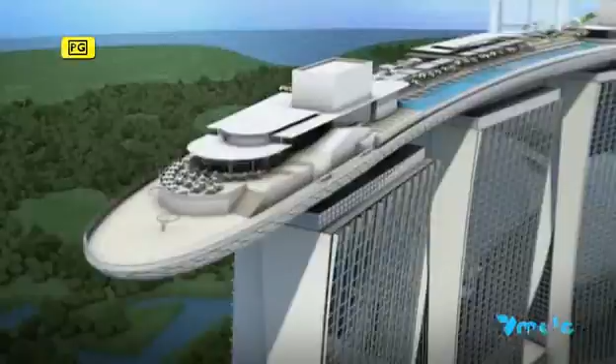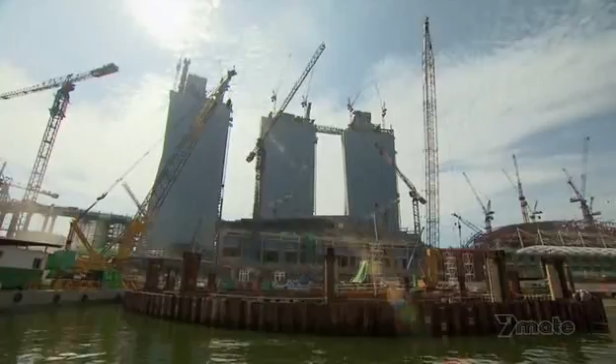Singapore's Marina Bay Sands is one of the world's most complicated construction projects. Engineers have to build not one, but 3 skyscrapers that will shoulder a sky park as big as an aircraft carrier. Worst case scenario, we get stuck. They have to devise ingenious solutions to assemble a 60-metre tall museum of impractical dimensions, install giant artworks, and erect seemingly floating pavilions for shopping and entertainment. If engineers succeed, they will create a virtual city unto itself.

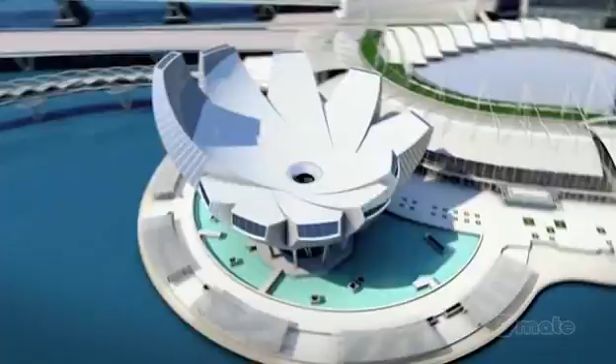Singapore, the Southeast Asian country, is smaller than New York City. The lack of space forces it to build its largest leisure and entertainment hub to date on a small tract of reclaimed waterfront land. The Marina Bay Sands. It's not one megastructure, but many. Serious challenges lie in the array of buildings that form the unique complex. 3 55-story hotel towers slope at such great angles, they're in danger of buckling under their own weight.

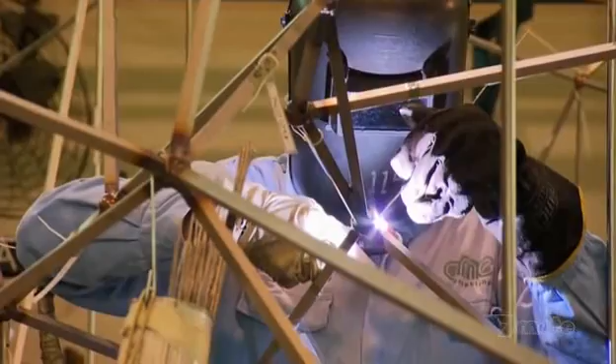An even bigger problem is the hotel's roof. A 340-metre sky park spans its length, containing gardens, outdoor pools, and the world's largest cantilevered observation deck. But how do you build something as big as an aircraft carrier, 200 meters in the air? In the hotel's atrium, mammoth works of art have to be somehow incorporated into the architecture. Its challenging centerpiece, a 15-ton mass of steel by a renegade artist from Britain.

A 60-metre tall art science museum is designed for maximum visual impact. It will be to Singapore what the Opera House is to Sydney. Only one problem. It seems too impractical to construct. And a set of dramatic glass-encased pavilions, while themselves pose little challenge, have to be built in water.

The man behind the Marina Bay project understands the risks, but he believes that anything short of astounding will fail. Sheldon Adelson, one of the world's richest men and CEO of Las Vegas Sands Corporation. What we hope to accomplish is to change the face of Singapore tourism. So we expect a very successful development.

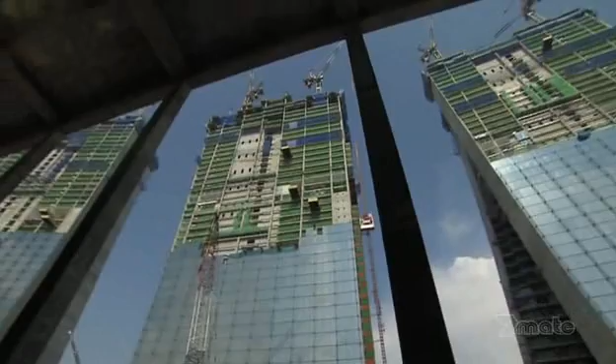That is by far the largest and most expensive single project we've ever undertaken. It'll cost about $5 to $5.5 billion US dollars. It's a lot of money. Now, I know $1 billion doesn't buy what it used to, but by any measurement, it's a lot of money today.

Adelson believes his huge investment is safe in the hands of Moshe Safdie, a world-renowned architect. Safdie is recognized for his use of dramatic curves and geometric patterns. The Marina Bay complex will be his largest and most difficult project yet. I think that architecture has to be timeless. Therefore, what it espouses, what it provides, needs to be something that has a long life.

What's unique about Marina Bay is all the pieces coming together. You can't think about it as individual buildings. You've got to think about it as a piece of city. It's much more a symphony than it is a sonata. On the ground, engineers are more concerned about the reality of building Safdie's vision. This is the North Retail section area.

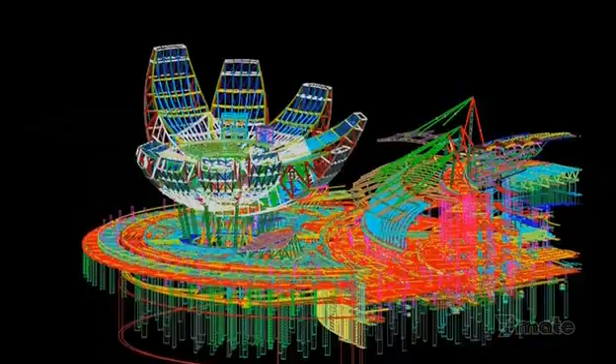30-year veteran John Downs is in charge of overseeing the entire project. The design is very, very diverse, and each component of the project is totally different from the others. For a project of this size, with the planning, with the design, with the construction, you'd be expecting somewhere between 6 to 7 years. Here is basically a 3-year turnaround.

The first and most critical construction task is to secure the footprint, though this normally straightforward job proves otherwise, since the site was originally allocated for boats. The complex sits on 560,000 square meters of reclaimed land, part of a decade-long plan to revamp Marina Bay, a former saltwater estuary that's now a freshwater reservoir.

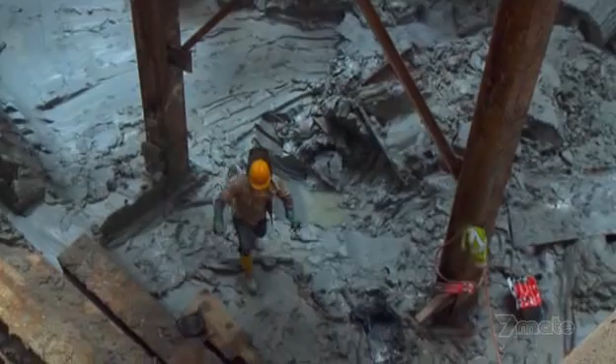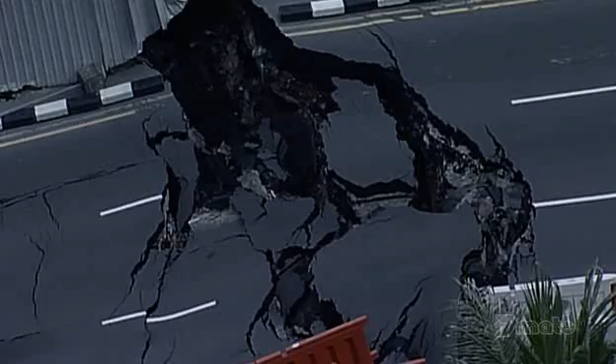Beneath the reclaimed land, which is essentially a seabed, is a dangerous layer of marine clay. Sometimes called black toothpaste, marine clay has very poor structural properties. If not given complete respect, the unstable marine clay is potentially fatal. In 2004, Singaporeans discovered the lethal consequences firsthand. A routine excavation in an underground tunnel for the mass rapid transit network causes a collapse, creating a gaping hole in the Nicoll Highway, killing 4 workers.

The ground conditions in which they were building the Nicoll Highway were not dissimilar to those we are encountering here. They had also soft clay, they had similar depths of excavation between 20 and 37 meters. One of the big things that was learnt in the Nicoll Highway collapse was the importance of monitoring movements and the control of quality as the construction proceeds.

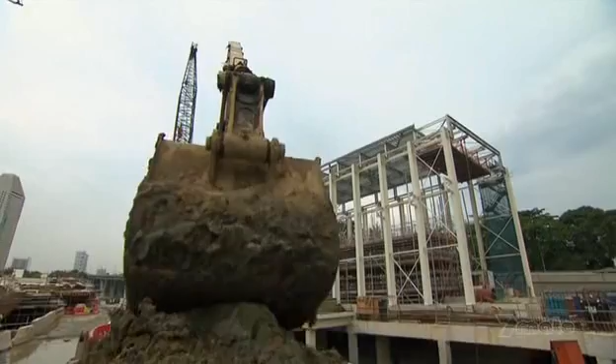Marine clay is an old foe of engineer Mike Barton. He's defeated it in the past by understanding how it behaves. The big problem with marine clay is that it is so soft that when you dig out the inside, the walls will move and potentially collapse and allow all the surrounding water in the bay into the excavation. So, before work can begin, the unstable building site needs major fortification.

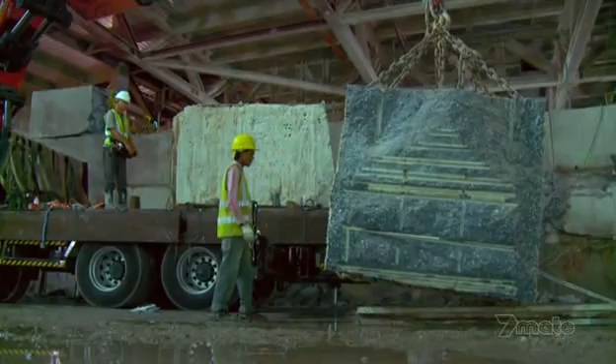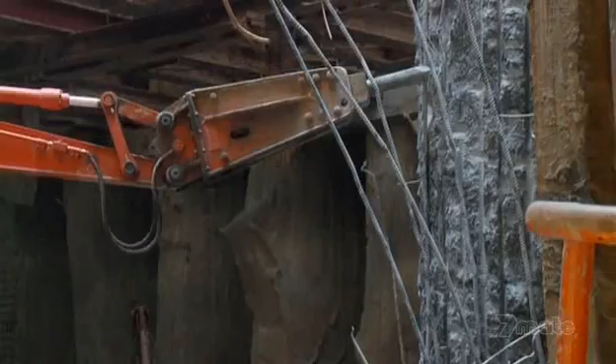To combat marine clay, engineers decide to build giant concrete walls to create stabilizing perimeters for the larger buildings, known as diaphragm walls. Up to 1.5 meters thick, diaphragm walls are steel-reinforced concrete sections, pounded 50 meters into the ground. They form watertight enclosures for men and machines to work round the clock. In just 1 year, over 4,000 meters of diaphragm walls help produce a rock-solid foundation.

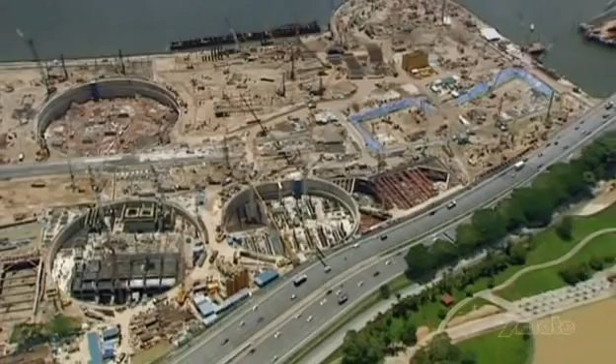The diaphragm walls that we constructed in a formation which we called a peanut formation, which is 2 circles joined together, and a donut formation, which is circular, are able to withstand very, very large forces from the marine clay without any movement. They encapsulate an area that's bigger than a football pitch that enables us to excavate very quickly and to build structure up very quickly.

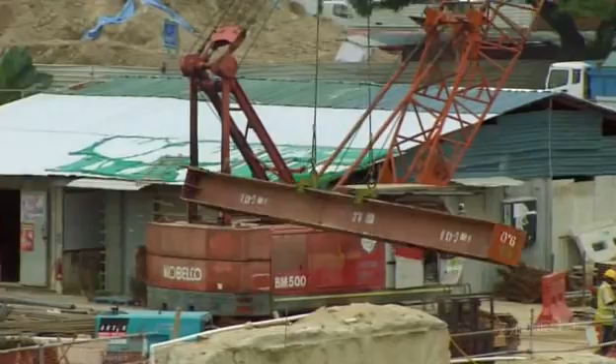Securing the footprint of the Marina Bay project has already taken a year out of John Downes' schedule. He now faces the difficult task of erecting the resort's many buildings in a space of just 2 years. Just managing the whole logistics of that, including the construction methodology, is very, very challenging for us. 1, 2, 3. To meet his tight deadline, Downes chooses the most direct solution. He hires 16,500 workers to construct every single building, simultaneously. It's like leading a small army. So organizational excellence is key.

We're just on the edge of Singapore in the CBD here. So rather than lose the contractors and the workforce to go off-site, we built our own 3-story project office. We have all of our contractors, our subcontractors here. We house our resident site staff. We have our project management team. We have our construction management team, our design management team, and the logistics here.

Come lunchtime, the monster workforce creates another massive challenge for Downes. He responds by building one of the world's largest site canteens. We've got 13, 14 different food styles here. You can see by my shape and size that I eat here every day. I enjoy this food. So here you can see the project bakery. It has its own ovens. It's set up for breakfast. We cater for sandwiches during the course of the day. Can I take a sausage roll, please? So, freshly cooked food, straight from the oven. We stand by our products.

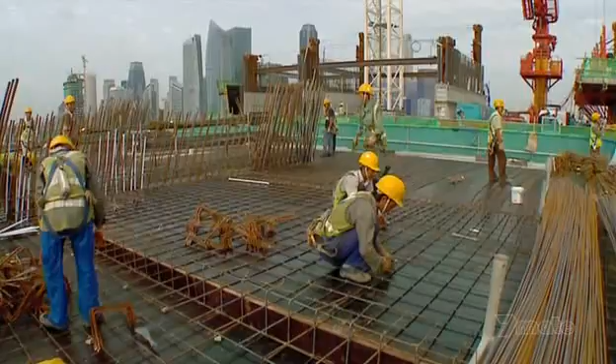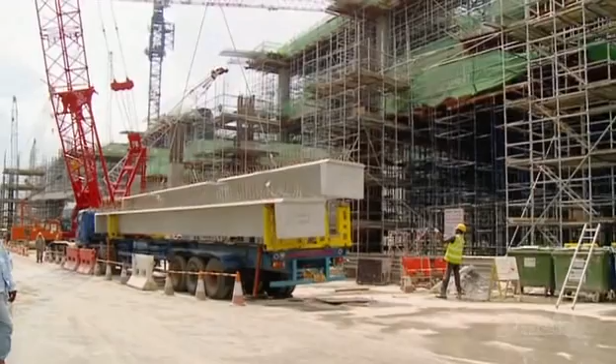The tight schedule also creates problems at the hotel towers, where engineers are already struggling with a congested site. The important thing to do is to make sure that they come in and deliver the goods straight away and then get out again. We don't want too many vehicles on site at the same time. To speed up construction and alleviate traffic congestion, engineers turn to a method that's proven itself countless times in the field: precast concrete casting. Hotel walls are made off site in the thousands. And workers laying the floors are so proficient, they produce 1 floor per 4-day cycle. It's an impressive display for a conventional solution.

But the structure they're attempting is anything but conventional. The key challenge of building the hotel towers is its unusual design. Unlike other skyscrapers, part of the towers slope at incredible inclines. Like a set of collapsing dominoes, the towers could buckle under their own weight if a practical building solution is not found. It's a major concern for engineer Craig Glover. I've been in the industry for 25 years, done a wide range of projects in many different countries, but nothing compares to this whatsoever. There was nothing we could take reference from across the street, on the next high rise, or across town. This is a new frontier.

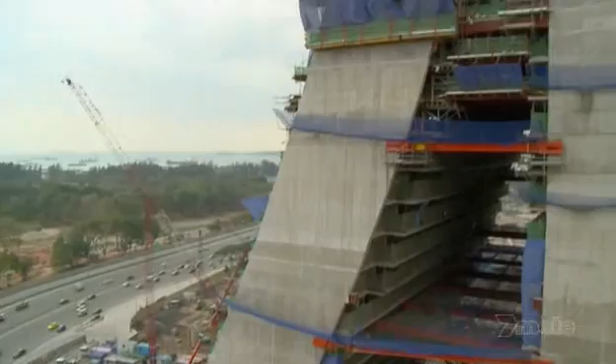Costing a staggering $5.5 billion to build, the Marina Bay Sands could be one of the world's most expensive mistakes if engineers can't solve the tower's problematic structure. Engineer V.C. Cheong leads the design team, and their solution comes out of left field. If you look at the configuration, it's not a straight tower. It's with a sloping leg. So all this sloping leg is inducing a very huge external force onto the structure. We kind of built it without any support. So we actually formulated a solution to prop up the sloping edge.

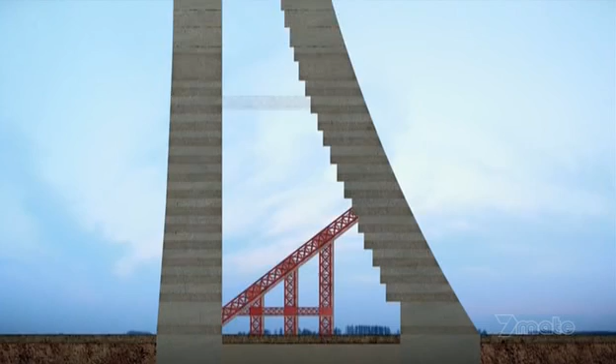Using a technique they've never employed before, engineers build large temporary struts made of strong structural steel. They prop up the sloping towers as they rise. Like a suspension bridge, high tensile steel tendons, also known as tension cables, give an added layer of support inside the walls. In theory, both the struts and the tension cables are temporary and will be removed once giant link trusses connect the towers at the 23rd floor.

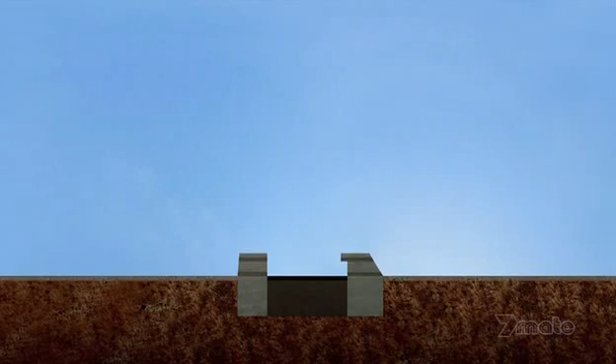The sheer weight in concrete is enough to topple the towers at level 8 if the engineer's calculations are wrong. To reduce the chances of failure, Glover and his team make a radical decision. Instead of removing the temporary tension cables in the tower walls, they make them permanent supports. I feel good it's in there because it's added strength, it's added support.

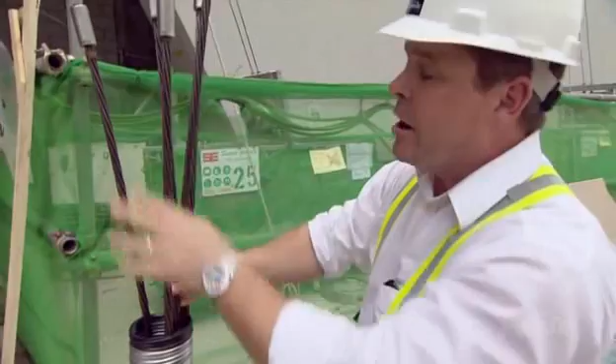We have a tendon here of high-strength steel, and what we do is we bundle these up so they form a cord with multiple strands inside this conduit. We place this conduit inside the walls prior to casting the concrete. So once the concrete is cast, we anchor one end into the concrete. We then put a very high-strength pneumatic jack onto the collar and one by one pull these strands through and tension them up. What that does is basically pull the building back and hold it in place.

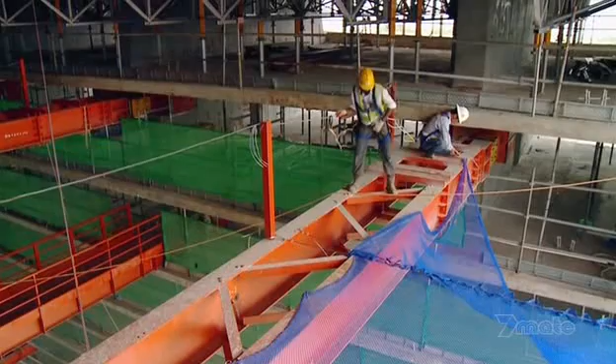If these cables were to suddenly break or if they weren't in place, we wouldn't be able to control the self-weight as we build more and more of the building up. So it's a very important part of the actual engineering of the solution to hold the building in place until we can connect it. Despite the team's quick thinking, the true test of their engineering decisions will only happen once the main support struts are removed and the massive link trusses installed.

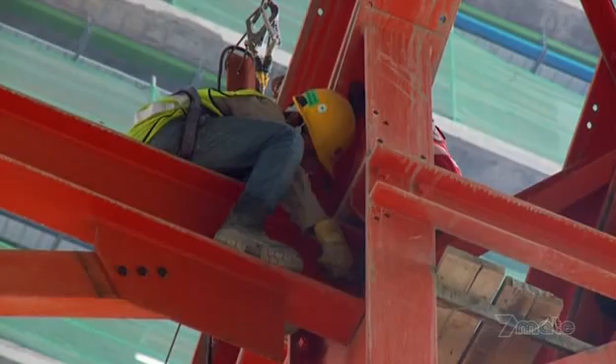Link trusses are huge reinforced steel brackets that bind the towers at the 23rd floor. Once their installation is complete, they transfer the sloping tower's weight completely away from its temporary struts. Once we're satisfied that we don't have any stability issues, then we can bring the large hydraulic cranes in and member by member start to dismantle the struts. We've got a lot of time pressure, so we've just got to make sure that these things keep moving. It's done its job holding up the building, now it's holding up the job.

As the last pieces of support struts leave the site, Glover and his team can finally breathe a sigh of relief. The link trusses are holding the building load. So far, so good. It's a lot of theory, a lot of calculations, but until you really do it and really get it out of the building, you never quite know. I'm always waiting for the phone to call in the middle of the night that we've got something gone wrong. Not all the structures have ended up according to plan.

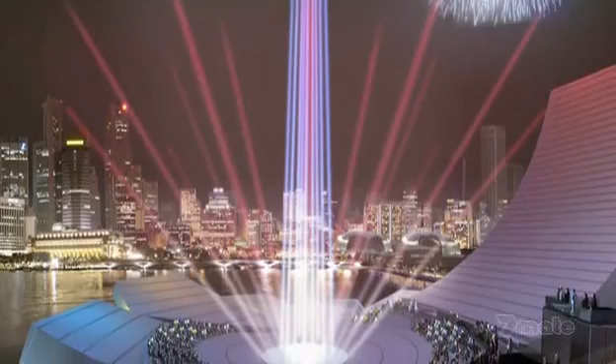The 60-metre-high Art Science Museum is facing a major design overhaul. Planned as a venue for blockbuster exhibitions on the arts and sciences, its bowl-shaped roof doubles as a 3,000-seat amphitheatre. Unfortunately for engineers eager to start its construction, architect Moshe Safdie isn't happy with its current shape. Somebody looked at them and said, looks like a bunch of bananas. In fact, Mr. Adelson said, looks like a bunch of bananas. I said, well, if they look like a bunch of bananas, we're not there yet.

It's terrible news for Safdie's design team, especially its principal, Gene Dyer. There are times that Moshe will come in with an idea. We think it's quite exciting. We'll pursue the idea for weeks or even months. He'll come back and say, I want to change the idea. And we've already bought into the idea, so it's a bit frustrating.

To rework the unique geometry and dimensions of the Art Science Museum, Dyer and his team turned to advanced 3D modeling programs. It not only makes navigating the museum's complex geometric patterns easier, it shortens the process to a matter of days. The model is dynamic and it can be moved by just changing one or two elements. Moshe could experiment. He could make rapid judgments in a very short period of time about which way he wanted to take the project. This is a process that was impossible to do 10 years ago. Without the computer, this would take years and years and years.

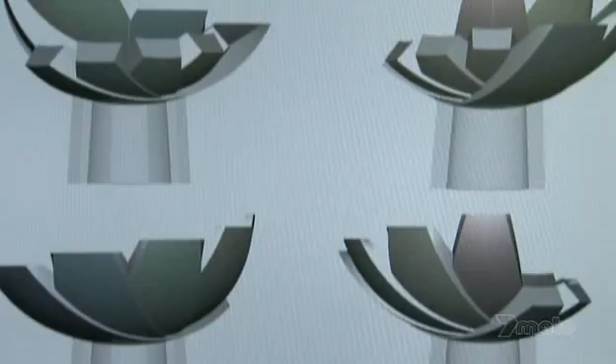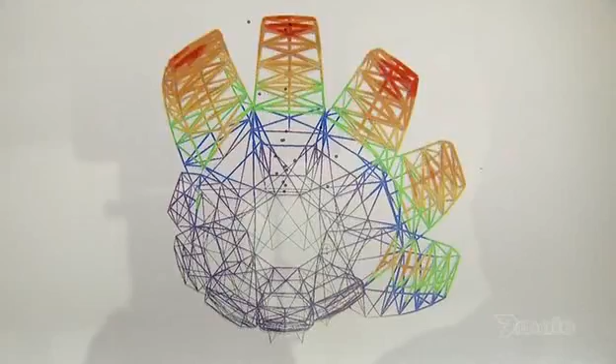To rationalize the new look into a buildable structure, architect David Robbins splits the museum into spheroid segments. We began to look at using different spheroids to define the different upper and lower surfaces of this building. That gave us a very rational way of describing the plan form to our clients. After months of refining the design, Safdie is finally happy with the result. The mathematical precision that we gave them made them even more beautiful. It led some people to say, well, hand of welcome. Others said, is that a lotus? And the more ambiguous the associations, the closer I thought we were getting to our target. Because I think the least exciting buildings are those which have overt symbolic associations.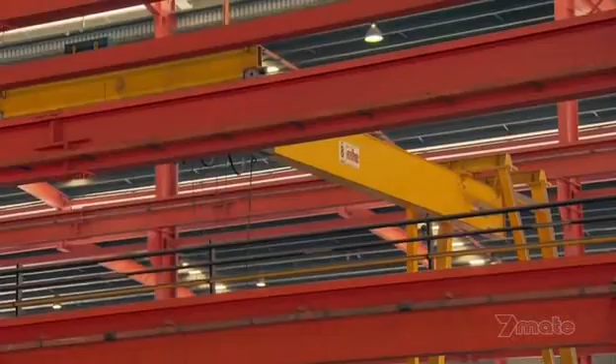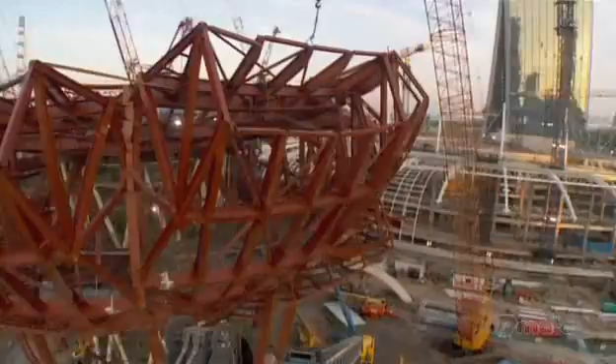Armed with the new design, engineers begin work on the museum's 60-meter-high superstructure. A staggering 5,600 steel elements weighing some 5,200 tons are prefabricated to exact specifications. They are then trucked onto site and assembled. It's like putting together a giant jigsaw puzzle. Each element has to be installed with pinpoint accuracy. If it's even a few millimeters off, engineers will have to start from scratch. Engineers of the massive atrium at the base of the towers are facing an equally tough construction process.

Safdie has come up with a challenging design. He wants to inject art into the atrium's architecture so that visitors will feel like they're walking through a grand Gothic cathedral. In medieval times, if you think of a Gothic cathedral, there's the architecture, there's the stained glass windows, there's the sculptures on the pinnacles. You cannot draw a line and say art and architecture. Art and architecture are one, they're singular experiences. And I think what we try to do here is come back to this integrative mode.

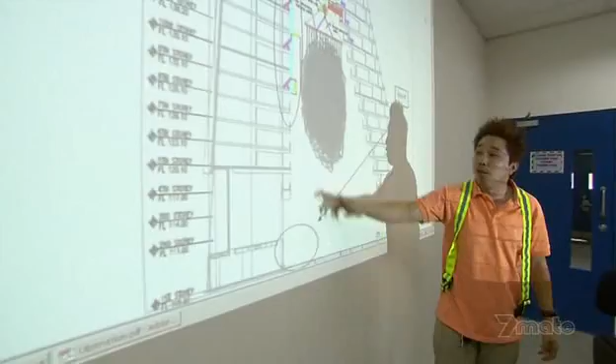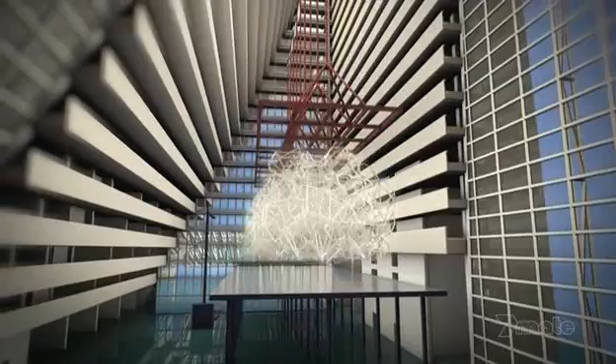To create the centerpiece of his vision for the atrium, Safdie commissions renowned British sculptor Antony Gormley. Famous for his unusual approach to art, Gormley is the brains behind the Angel of the North sculpture in northern England. What he's about to attempt is proving to be more of a construction challenge than an artistic one. A cloud-like sculpture some 40 meters long, made up of 15 tons of high-grade stainless steel, hung 12 stories above the atrium.

The Angel of the North is, in a way, making a very traditional public sculpture because it's isolated in space at the edge of a valley. You can see it for miles and miles. It's very much about occupying space. This is about activating space. You can't see it for miles and miles. You have to be in the space with it. Each viewer, every person coming out of their hotel room will confront this big chaos thing and have to find their place in it. I think that's an exciting thing.

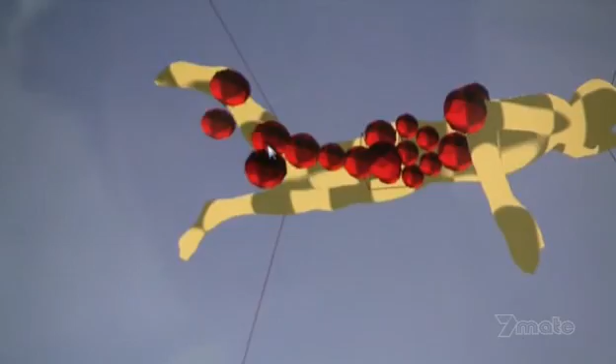Called Drift, Gormley's steel sculpture is so huge and so complex that it can't be sculpted using traditional methods. Gormley's team has to create state-of-the-art 3D computer programs that translate his ideas into buildable plans. But just as they're about to begin construction, a bombshell drops. September 2008, a global financial crisis wreaks havoc on markets. The flow of the hundreds of millions of dollars that keep the Marina Bay project going every month suddenly stops.

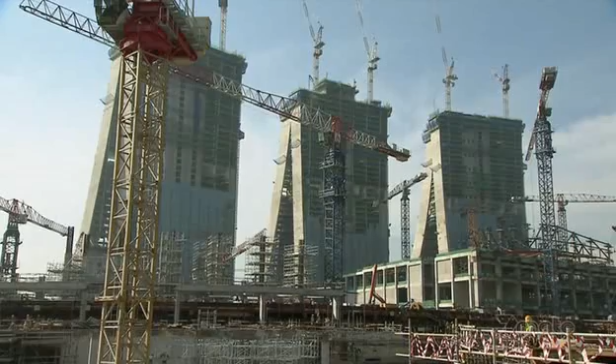For engineer Matthew Pryor, it's a massive blow. I feel devastated. It couldn't be worse. Probably the worst day of my life professionally. There's no more money coming through. So unless we put some funding in place or there's something, we're going to have to shut the jobs down. But there's a tough decision to be made, and we don't know what we're going to do just at this point in time.

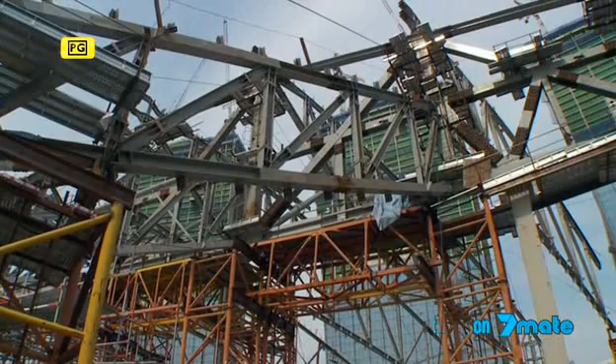With the future of the multi-billion-dollar project plunged into doubt, all eyes turn to the man behind it, Sheldon Adelson. The next move of one of the world's richest men will determine the fate of the mega construction site. The 2008 global financial meltdown is a haunting echo of the 1990s Asian crisis. Back then, progress on Shanghai's World Financial Center came to a complete halt for 5 years. For Adelson, that's simply not an option for the high-profile Marina Bay resort. His vision of changing the face of Singapore tourism is at stake. And so are billions of dollars of investment from his Las Vegas Sands Corporation.

He prefers finding a stopgap solution to weather the storm. Throughout history, there has never been a trend that went straight up, nor a trend that went straight down. So it goes up and down. It's only a matter of time when things will recover. In a bold move, Adelson pledges his vast personal wealth to the completion of the project, effectively ending any speculation of failure. There's a massive sense of relief in the company. I mean, everyone pleasantly surprised how quickly we've got through this and the fact we could hold it together and get it going again. So euphoria is probably the best way to describe it.

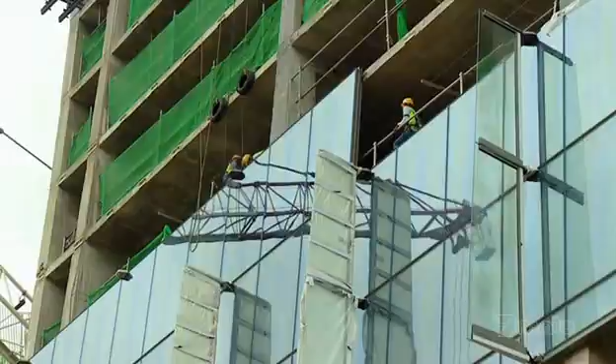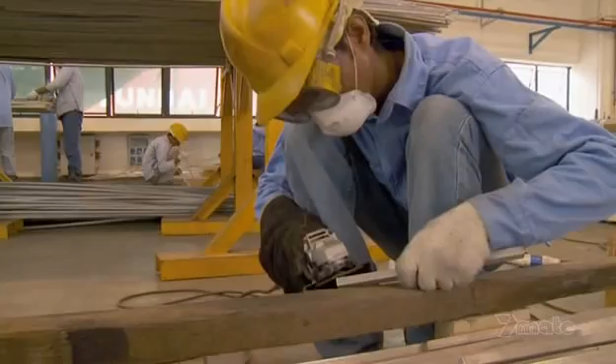With the crisis averted, construction on the 3 55-story hotel towers, the casino, theatres and convention centre resumes at pace. Everywhere you turn, steel is being installed. It's vital reinforcement for every concrete structure on the 15.5-hectare site. For one project at the tower's atrium, steel is more than just reinforcement. To construct the 15-ton Drift sculpture by British artist Antony Gormley, engineers had to first laboriously prefabricate it into over 70 segments. The segments are then welded into 8 slices and will ultimately form the sculpture.

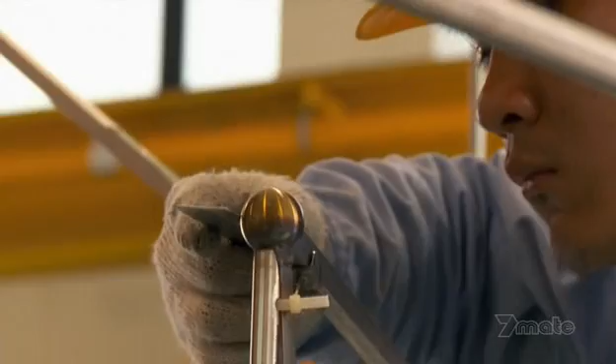It's a tricky operation, but engineers are able to complete it swiftly due to a system of codes and numbers that enable them to quickly identify what goes where. Once all 8 slices of Drift are fully assembled, it's lifted up into position by a temporary lifting frame. A massive box truss on the atrium ceiling then takes over the load. In theory, the box truss will support the weight of the lifting frame as it's being lowered down. It will be a heart-stopping moment, especially for engineer Graham Stevenson. The lifting frame is about 9.5 tons, so when it picks up and gets some momentum, there's a potential that it just wants to flick over and rotate through its full 90 degrees, and we won't have it under control.

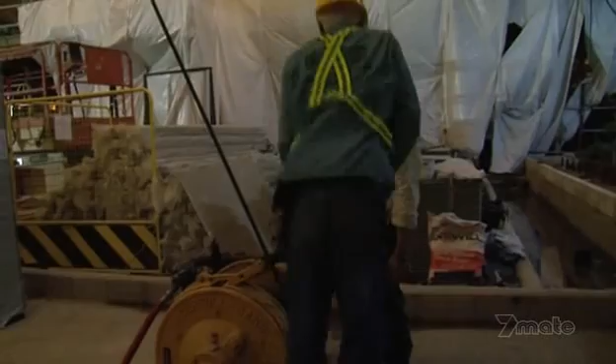Stevenson's solution: 4 powerful automated hoisting drums located at the 4 corners of the frame. They allow workers to control the strength and speed of the operation with high tensile steel cables. A spotter at the top determines the pace of the procedure and marshals the team.

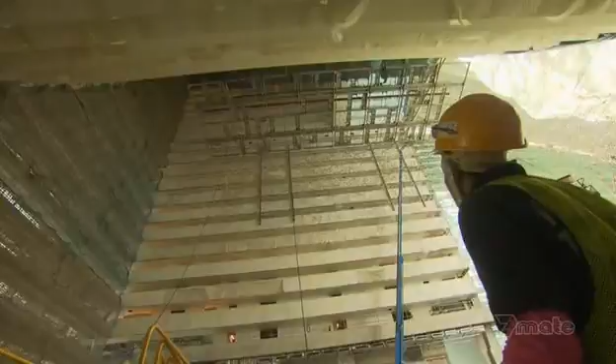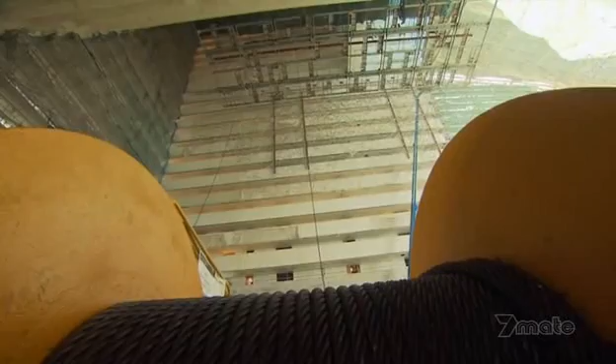With their preparations complete, it's time to face the moment of truth. Sculptor Antony Gormley is as anxious as any of the team. Number 3! The entire operation is estimated to take up to 10 hours to complete. As soon as the frame is in motion, there's no turning back.

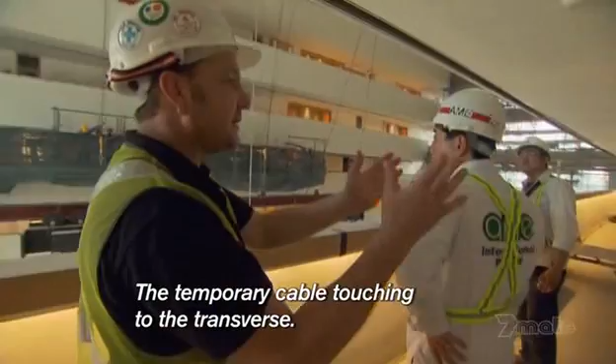Midway through the lift, Stevenson receives reports of a potential problem. 22 story, number 7 temporary cable, scaffolding touching the cable. Why you got the temporary cable touching to the transverse? Yeah, but is it just the end of a tube? Yeah. So you can just cut the tube? Yeah. Problem solved.

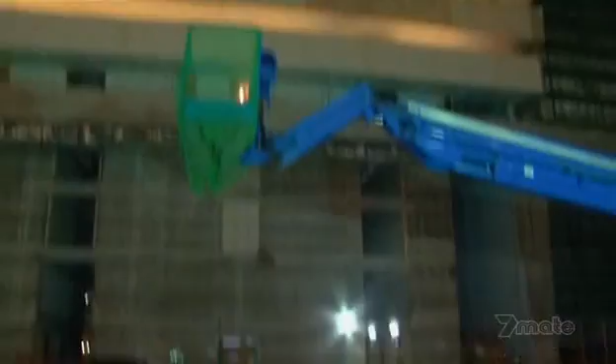But what was previously an estimated 10-hour procedure now turns out to be a 24-hour marathon lift. At 6 a.m. the following morning, they complete the job. Absolutely fantastic. The Gormley is now finally in its final position, so really an end of a long and exhausting day, and big thanks to everybody, but it's finally done.

While the drift settles into its new home at the hotel atrium, elsewhere attention is focused on one of the project's key features, the Crystal Pavilions. The two glass-encased buildings by the promenade are set to be the resort's premier shopping and entertainment complexes. But before engineers can make them a reality, they have to secure their footprint. And already a major obstacle threatens to sink their objective.

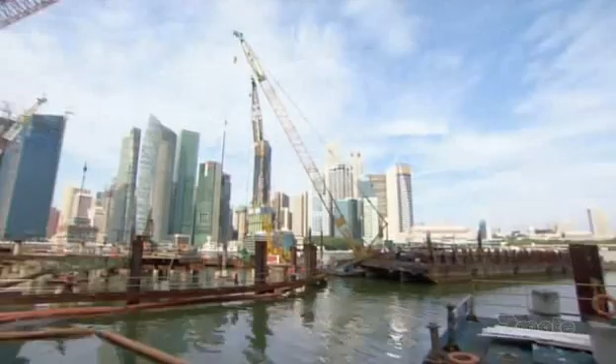The Crystal Pavilions are situated within the confines of Marina Bay. So to found it, engineers have to find a way to build in 6 meters of water. The responsibility of tackling the problem falls on the shoulders of engineer Kurt Vella. I'm from Sydney. The underlying foundation in Sydney is sandstone, it's rock. All you need to do is just dust off the surface and you can build skyscrapers on it. Here it's very different. All the structures have to be heavily founded.

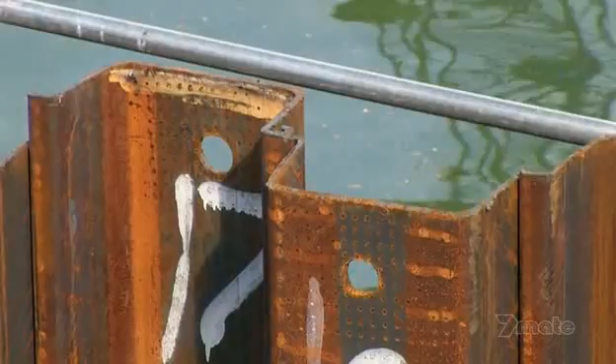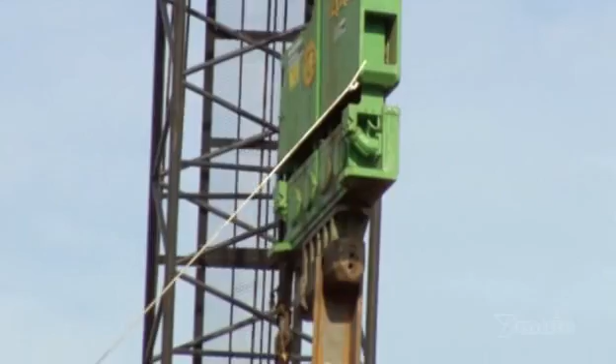To keep water out of the construction site, only one solution seems viable for Vella and his team. A waterproof steel structure called a cofferdam. This temporary formation surrounds the worksite with a circle of steel sheet piles, creating an impenetrable shield that locks out the water, keeping the workers safe within. For the job, they rope in a 12-ton vibro hammer. It punches the sheet piles deep into the earth, making the cofferdam rock solid and resistant to movement.

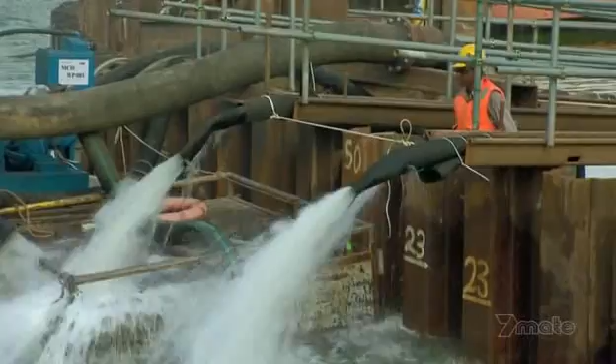With the cofferdam secured, engineers deploy powerful diesel pumps and run them 24 hours a day, ejecting any water that remains within the walls. This last step comes with inherent dangers. The force of the water outside creates what engineers call hydrostatic pressure. In theory, it's powerful enough to force water through any gaps in the cofferdam. It's something that Vella prays will not happen.

There's a bit of hesitancy and concern because we've got to build this building in the middle of Marina Bay. Everybody can see what we're doing, so if it leaks, it's a problem. If it fails, if it moves, if it collapses, it'll be an absolute catastrophe. After a day of pumping, Vella's worst fear comes true. Parts of the cofferdam are leaking.

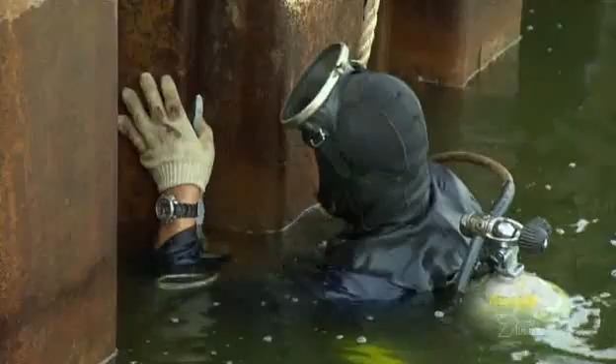To rectify the problem, Vella orders a team of 8 divers into the water on 10-hour shifts. Their mission? Find out where the water is being forced in and plug them shut with epoxy resin. Anson Lee is an 8-year diving veteran. The toughest part of my job is the environment. The visibility is poor here. It's totally zero, I cannot see anything here below.

I solve that by feeling the suction and then feeling out the thing. You have to overcome all the fear that you can't see under the water, but okay lah. I feel proud to be one of this team to build this thing out. After 2 weeks of hard work by divers and the pump crew, the job is finally complete. Kurt Vella can also breathe easy.

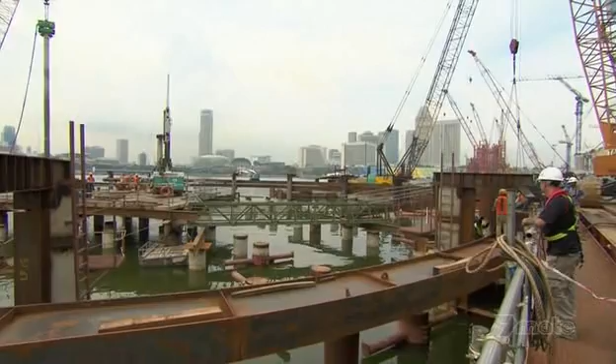Every job is different, every job has its challenges. You plan and prepare, you try and identify your risks in advance, and you try and come up with contingency plans. And that's what's really enjoyable from my perspective. That's what gets me out of bed in the morning.

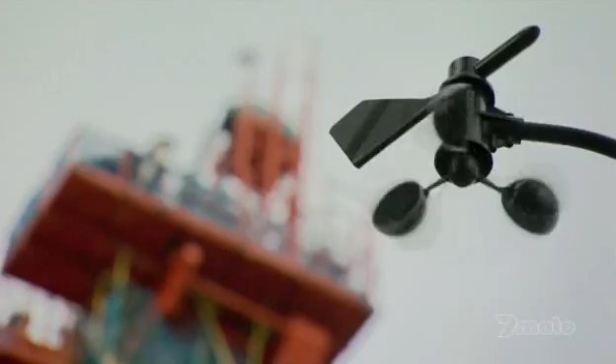After 2 years of battling the elements and overcoming difficult construction milestones, the 3 sloping towers of Marina Bay Sands can finally celebrate their topping off ceremony and move on to the next phase. But a destructive force of nature threatens to throw a spanner in the works. With climate change predicted to affect the pattern of Southeast Asia's typhoons, Singapore may one day experience the destructive tropical storms plaguing its northern neighbors in the Philippines and Taiwan.

When that happens, typhoon-force winds could spell disaster for the hotel towers, especially the 340-meter sky park sitting on top of it. The force of the wind can make the buildings sway dangerously, causing irreparable damage to the structures.

The Sky Park, offering 360-degree views of Singapore. The visionary design will have enough surface area to park 4.5 Airbus A380s. But when architect Moshe Safdie first mooted it, it stemmed from a purely functional need. Luxury hotels, as we think of them, always have lots of open space around them, gardens, at least in the kind of tradition. But we didn't have much space left.

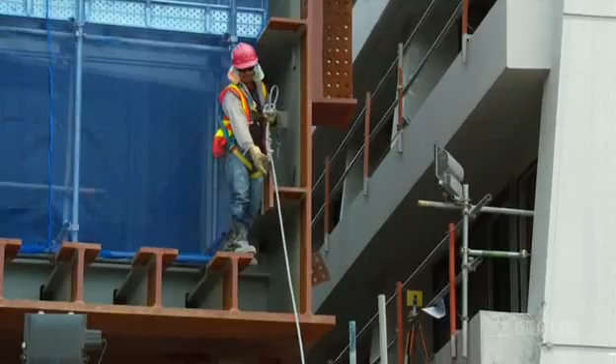To fight the enemy, McKee knows he has to first understand the enemy. He hires leading US wind engineers CPP to carry out extensive testing on the towers and sky park. Their mission? Find out how Singapore's potential wind forces affect the buildings. Wind engineer Roy Denoon oversees the process at their state-of-the-art wind tunnel in Fort Collins, Colorado.

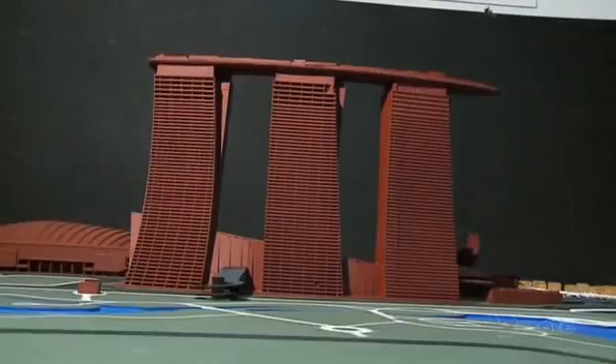The thing that makes this really special is the fact that we have this sky park running across the top, linking all the towers together. So whereas normally with a normal tower, we'd measure the loads on the tower in isolation, with this one, what we're needing to do is to measure the loads on all 3 of the towers at exactly the same time. So that way we can know how the towers are going to move relative to each other, so we can make sure that they're not going to put excessive strains or movements into the sky park.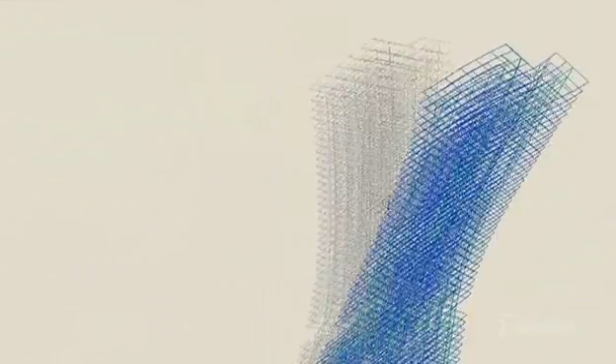During the tests, a scale model of the Marina Bay Sands towers is blasted with 40km/h winds to simulate faster typhoon winds in reality. Over 1,000 pressure measuring instruments inside the model register how the winds affect the buildings. At the end of the tests, engineers confirm that the 3 towers can deform by some 200 millimeters during the fiercest storm. Engineers quickly figure out a solution: movement joints. Inspired by bridge engineering philosophy, movement joints are essentially gaps located between the concrete towers. The huge gaps allow for movements of up to 250 millimeters.

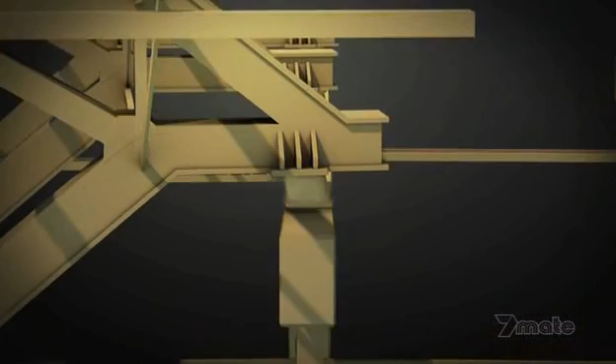Aluminium and stainless steel plates act as sliding components. They can move back and forward over each other, a little bit like you'd see in a flexible bus, where you have that articulation happening in the middle. It's a similar concept to that. To accommodate the differing movements of the three towers, engineers install multi-directional steel bearings below the Sky Park. The solution scores major points with Tony McKee.

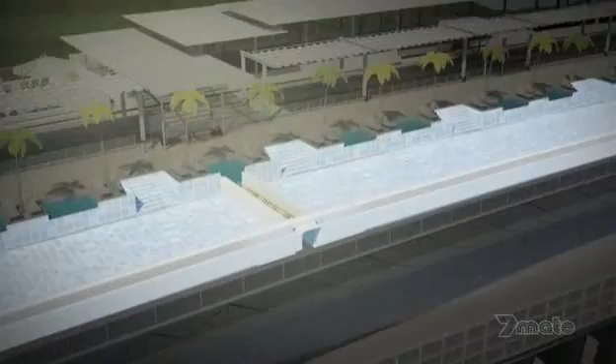Only one problem. It won't work with a rigid structure containing 1.5 million litres of water. Any movement in the joints could fracture the Sky Park swimming pool, endangering lives and property below. With the help of US pool builders Natare, McKee quickly develops a solution, but it's completely unproven. A secondary system of movement joints built into the pool itself. The plan: to split the pool into 3 smaller 50-metre units. Steel top hats then conceal the gaps. Huge basins catch any runoff pushed up by the moving pools.

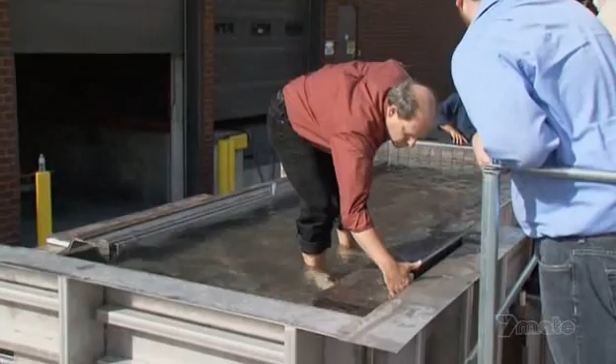McKee knows he only has one chance at making this work. So he commissions a trial by water. What we've got here is the side of the swimming pool, which replicates the movement that we're going to get between the towers. And what the Natare guys have come up with here is a simple track system which can be pushed back and forward by a forklift. And that replicates the full range of motion that we have on the swimming pools, which can be 0 to 250 millimetres either way.

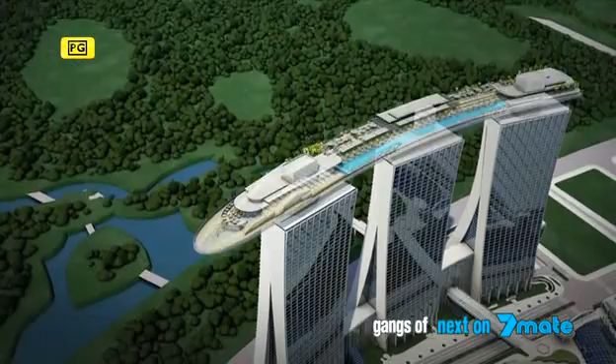It takes engineers weeks of testing before they're completely satisfied. Consisting of some 10,000 tons of steel, the Sky Park is as big as an aircraft carrier. The most practical way for engineers to construct it is to break it into 14 segments on the ground before assembling it at the top of the towers. There's no room for miscalculation at 200 meters in the air. Each segment is carefully prefabricated and tested by steel specialists Yongnan, and then trucked to the site independently.

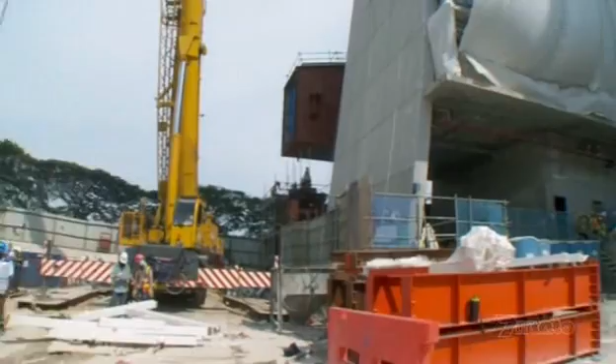From the very beginning, McKee and his team anticipate that their biggest challenge will be lifting the 2 largest segments of the Sky Park, the box girders. Measuring 80 meters long, their combined weight is a staggering 1,400 tons. How do we feel? A little bit of apprehension. You know, it's a significant lift that hasn't been done before. If something goes wrong, it could be really significant for us.

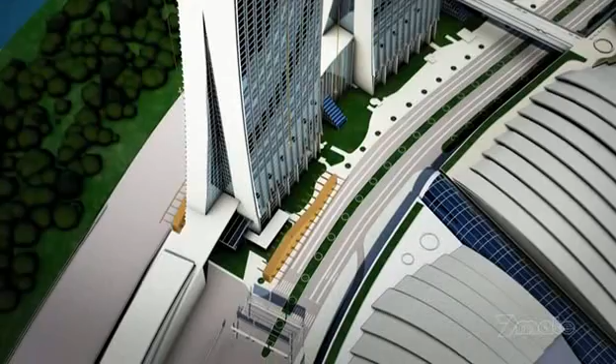To reduce risks, McKee turns once again to proven bridge building technology. In a process known as strand jacking, giant temporary lifting gantries made of strong structural steel will use powerful hydraulic jacks to lift the box girders up to the top of the towers before sliding them into place. It will be the longest and largest lift of its kind in the world, and McKee needs the best in the business. He puts a pioneer in the field in charge: Swiss-French company VSL.

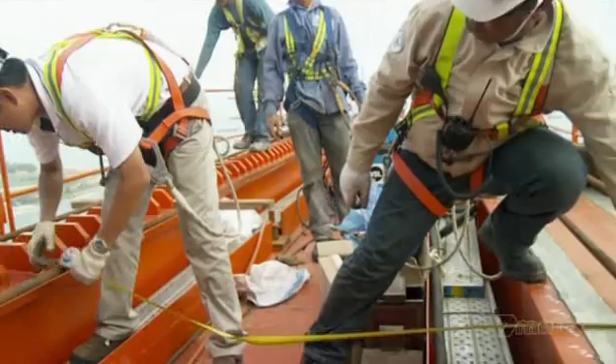Engineer Eddie King and his team have successfully raised bridges, stadium roofs, and even Ferris wheels. The toughest part of my work is to have to plan everything very precisely, because everything is set up in millimeters. So we have to lift up and slide it in and position it in 5 or 10 millimeter accuracies. If we don't do it properly or safely, the biggest hazard is the thing can fall down to the ground.

Other factors further complicate the lifting process. Due to an increasingly tight schedule, the team is forced to conduct the lift during Singapore's annual monsoon season. It's almost impossible to predict when a tropical storm will hit. When it does, the accompanying lightning strikes can endanger lives. And because the whole operation takes place meters from a jam-packed highway, curious onlookers will be able to see any mistakes the engineers make. It's a potential public relations nightmare.

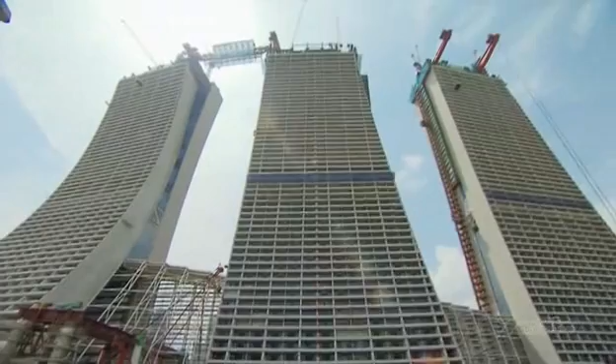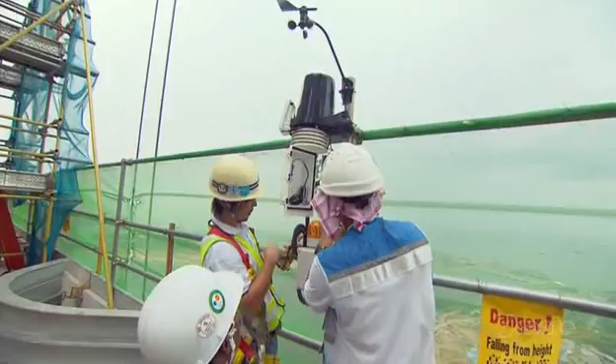Worst case scenario, we get stuck. And then we've got to figure out how to release it, how to continue lifting, because basically once we get going, we keep going. Okay, now I stop that. During an estimated 16-hour lift, the box girders will move at a cautious 14 meters per hour. Eddie King and his team constantly check their weather gauges for any incoming storms. The hydraulic jacks are also inspected regularly for overheating. No one wants the operation to stall in mid-air.

Despite the team's best efforts, Mother Nature catches them by surprise. Okay guys, rain is coming. It's better we stop here. An approaching downpour threatens to grow into a lightning storm. We are at 200 meters above and the surrounding buildings are quite far away. So there's a chance of the lightning striking on a high point like this. So we've got to stop and wait until the weather gets better before we continue our lift.

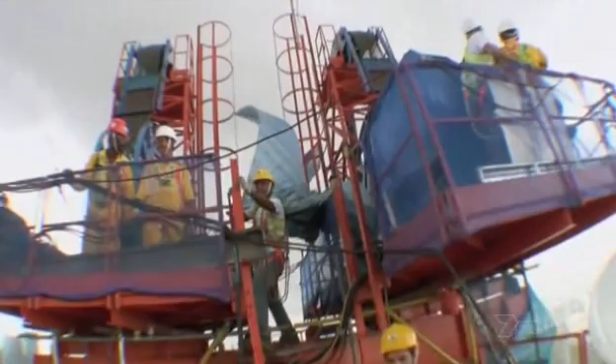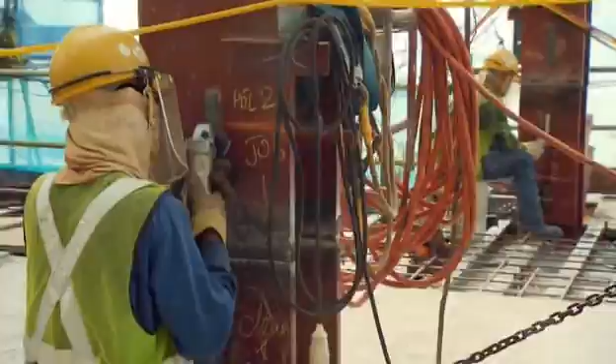As the final piece rises into place, Singapore is already marveling at the team effort behind one of the world's most ambitious building projects. In just 3 years, engineers overcame seemingly impossible construction challenges, defeated marine clay, engineered ingenious design solutions, and survived the most debilitating financial crisis since the 1930s. As the finishing touches are put on the resort, the stage is set for an opening party, Singapore style. Those involved reflect on the project that has already far surpassed their expectations.

It's a bit kind of overwhelming, you know. I'm in the process of disconnecting the umbilical cord. It's not easy for an architect. This type of project probably only comes around every 25 years or so. So it's been a lot of hard work, extremely challenging. I couldn't list the number of challenges we've overcome along the way to get to today. Everybody is saying this is kind of a miracle, never seen anything like it. And it's rewarding, it's nice. The Marina Bay Sands, Singapore. Proof that with visionary design and engineering know-how, megastructures can still defy the odds and fulfill the wildest dreams.